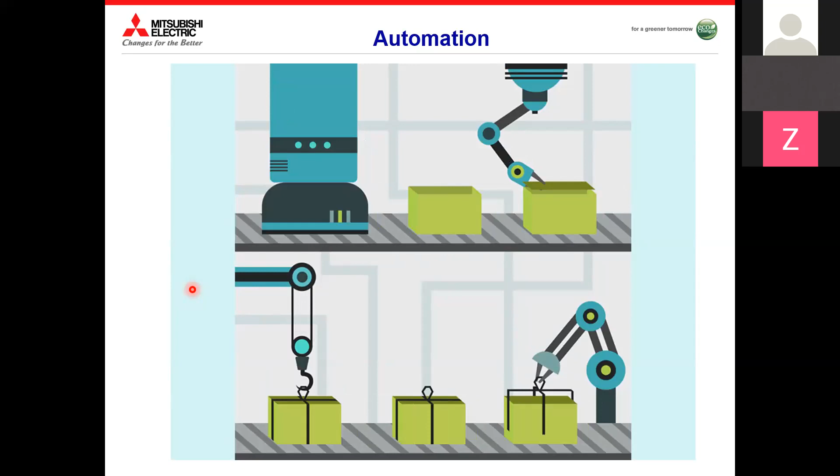This animation shows you how automation works for packing material. Even though it has not shown any manpower involved, you can still minimize the manpower. Instead of 4 members, you can work with 1 member. The dependency on human beings gets minimized by using automation.

So the background of these solutions involves products like PLC, robotics, and many different kinds of automation products.

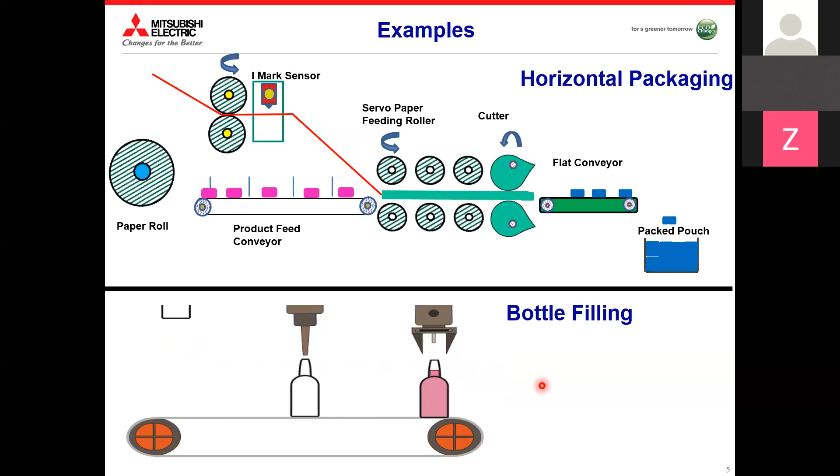This is another example of packaging. Here at the back end you can see what we have used, like PLCs, controllers, HMI, and servo. In the front screen you can see how the roll is getting unwound, how the tension is maintained, and converting it to a particular bag. But at the back end, such kind of automation system is being used.

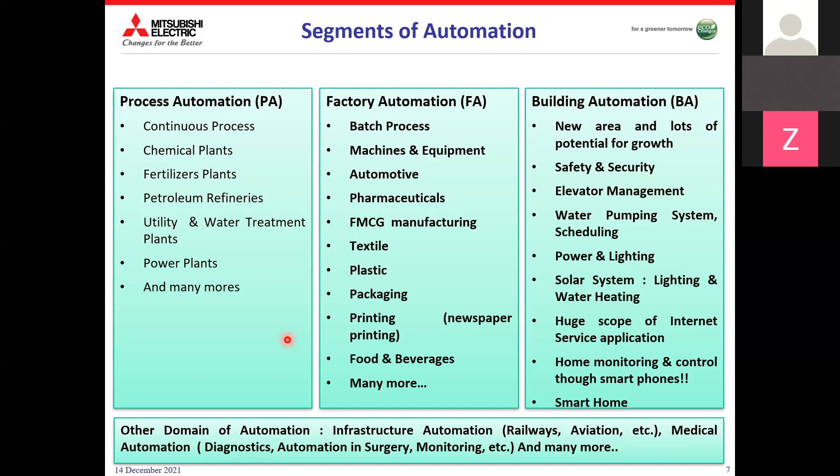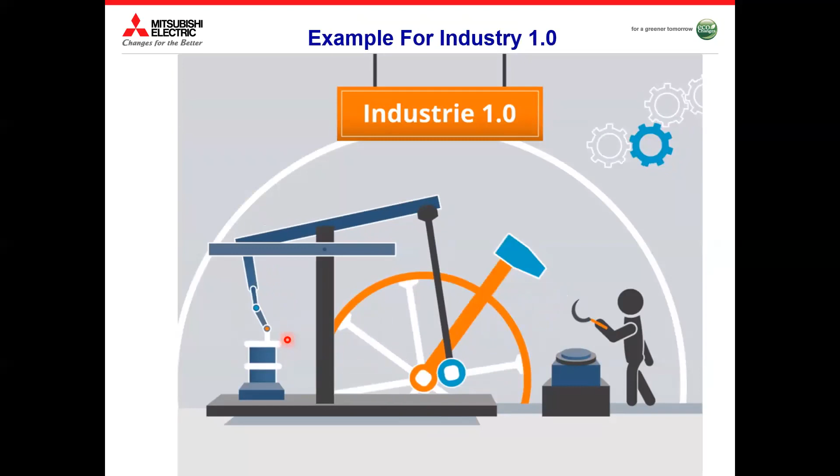This is one example of Industry 1.0, showing how mechanical energy has been used for production. You can see this hammer is being managed to work as a human hand, so that it can help in industry for any kind of production. This is the example of the 18th century where we were talking about Industry 1.0.

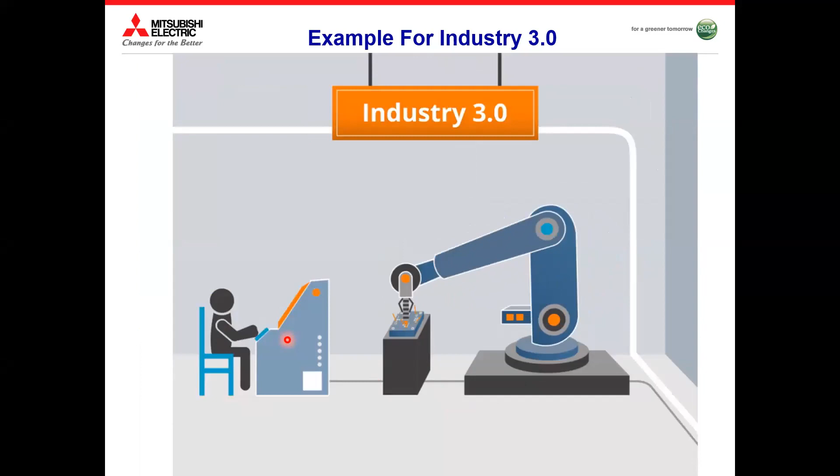I'll put up some case studies for factory automation, why it is required.

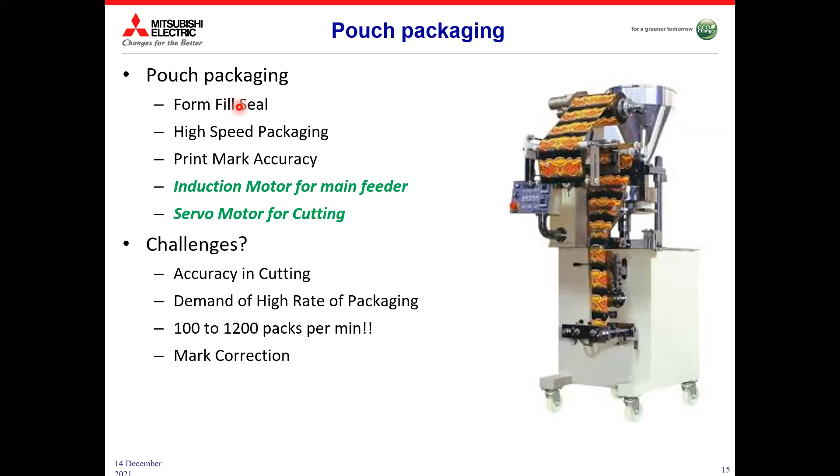In the previous example, you saw how that tea bag was packed nicely, how proper the cutting of the box was. So this is a very critical and challenging part, which of course we can overcome by using automation. The demand rate is very high, like earlier 100 to 1200 packs per minute, and customers nowadays are demanding even more than that. PLCs, drives, servo motors, and induction motors are the components for this kind of machine as part of automation. So the engineer has to deal with all these components to make such kind of solutions.

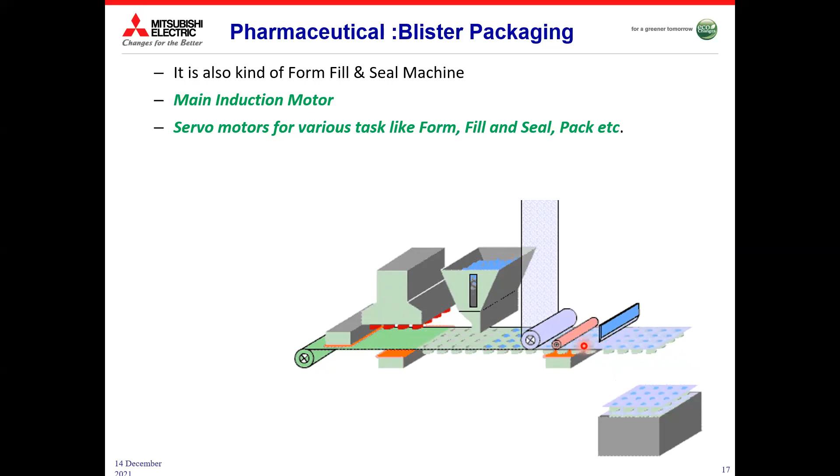See, you can see here the challenges you can face while implementing such kind of automation, or what are the demands from the industry side.

Demand rate has increased manifold. For example, when we talk about packaging, earlier 100 packets per minute was good enough. But nowadays people's expectation is more than 1,000 packets per minute. Just imagine, within 1 second you need to produce 15 to 20 packets. So you need to tackle such kind of challenges by using automation products.

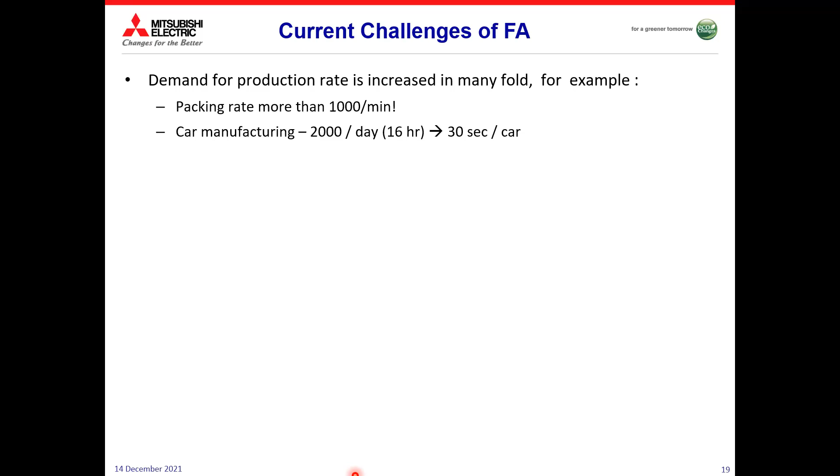Easy product change. All the customers want a single machine where they can use the same machine for small pack, medium pack, and large pack. They don't want to keep 3 machines. So there's a need for flexibility in machines for easy product change.

Synchronization of moving parts. When we are talking about such high accuracy or high production rate, the mechanical part should be robust to support that kind of system. Rest of the challenges like high accuracy, energy efficiency, these are some of the challenges that can be countered by using automation.

Of course, the engineers are the backbone for such kind of automation.

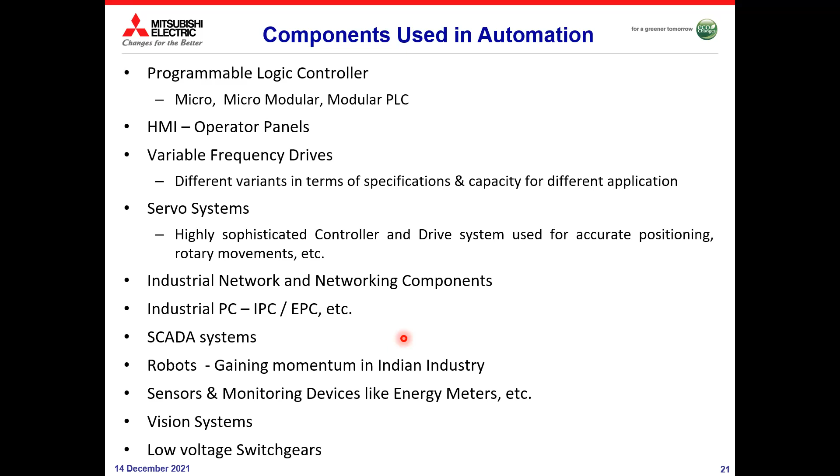These are some examples of automation where components are being used, starting from PLC, HMI, variable frequency drive, servo system, networks, IPC, SCADA, robotics, and all the things. Let me put you quickly in front of Mitsubishi's things, then I'll take you to robotics directly.

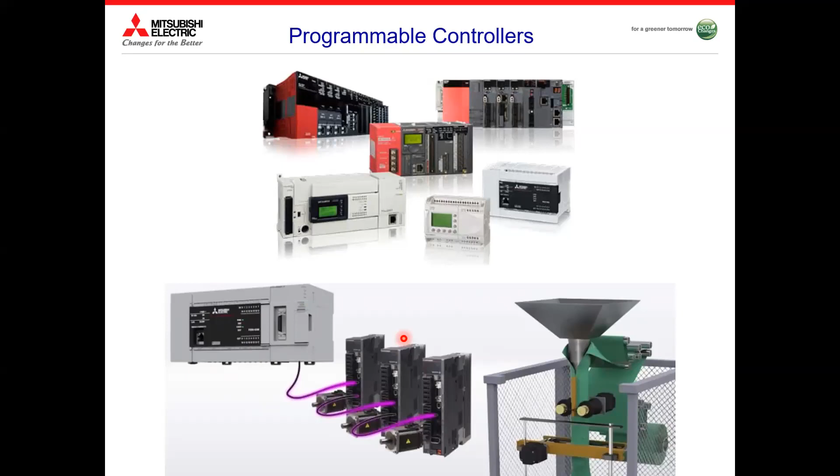This is cheap and has less IO handling capacity. It has a lower version of the iQ-R PLC with memory capacity and processing. There are some more parameters.

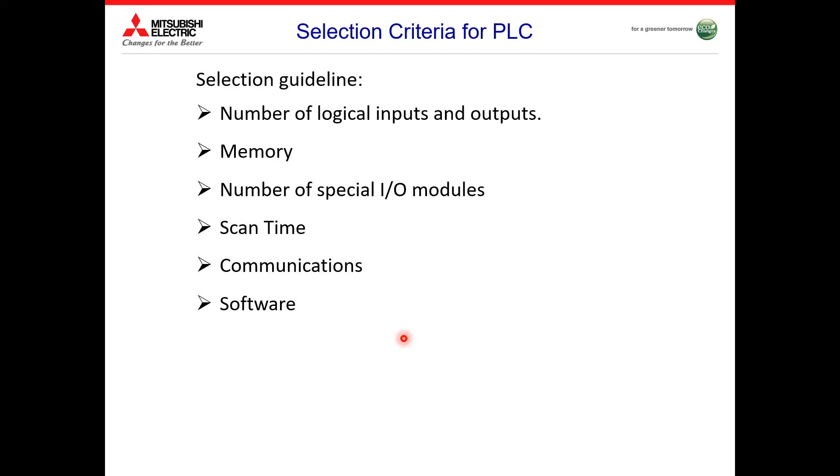When we talk about PLC, how to select it, some criteria like we should check the inputs and outputs required, the memory size, and the special IO modules we are going to connect. Special IO modules could be analog type modules, RTD modules, temperature controller modules, weighing modules, vision system modules. So how and what we want to connect. Scan time, communication software, of course, these are some of the areas to consider.

Everybody, as engineers, you know how the PLC works. First it sends the input signal, then based on our programming design, that input is processed, and accordingly the output module delivers the output. We can get voltage from the output module, and we can operate solenoid valves, contactors, motors in the field.

Another example is HMI, human machine interface. These HMIs are always used in front of the panel, so that the user doesn't need to open the panel or work on the PLC directly. They can control the PLC using this HMI. This HMI is used to display data, the production data, and to control the PLC, where you can input the field data as well.

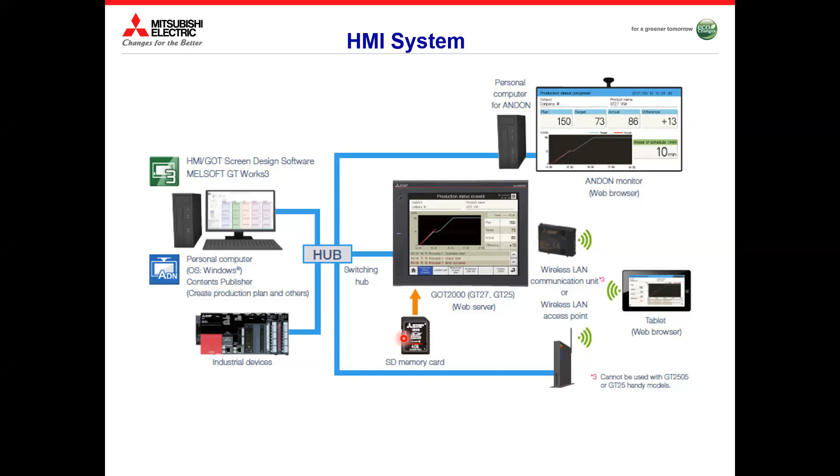We can use soft HMI. We have one good facility in our product: when HMI is not able to communicate with the PLC due to any reason, maybe it becomes NG or gets broken, so we cannot stop the production. We can temporarily convert our PC as a soft HMI, so we can operate the system from our laptop itself.

We have another good facility for Wi-Fi connectivity. We can connect this GOT through our mobile, smartphones, tablets. So from the remote location, we can monitor the GOT data. No need to move to the working area again and again. From your sitting area, you can monitor the production rate.

This is an example of the andon system. It is very often used in the industry. These are the big displays. Such displays are hung in the center part of the manufacturing unit area, where they can be seen by the maximum number of people on the shop floor. So you get different kinds of data, the production data, kind of failure. Some station is having a problem, some engineer needed.

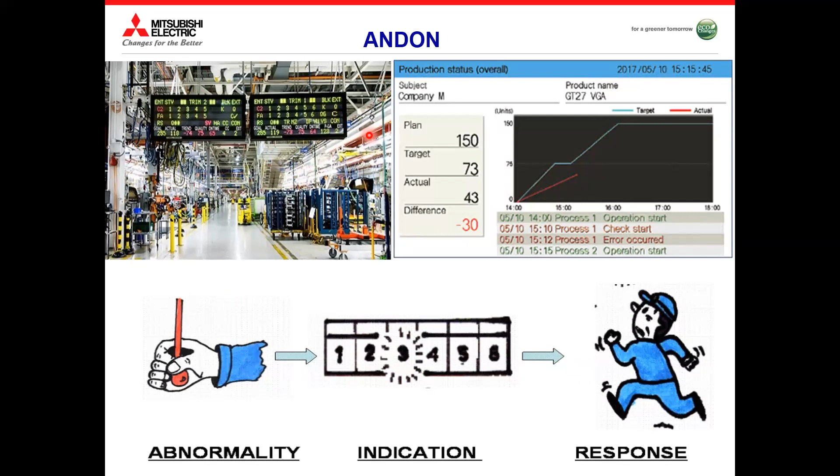So they use a pull cord system. They can pull this cord and station number 3 becomes NG. This message displays here, and when any maintenance engineer anywhere in the plant hears the hooter and gives attention to this display, he can judge that station number 3 is down. So immediately he can rush to that station to support. Such andon systems are very useful from a production point of view, to save time and have a wide vision of the production area.

Now another example of VFDs. VFD is being used for speed control of any kind of induction motor - that's the basic purpose. Of course, we can use it for torque control also, but majorly it's for speed control, and these VFDs are energy efficient as well.

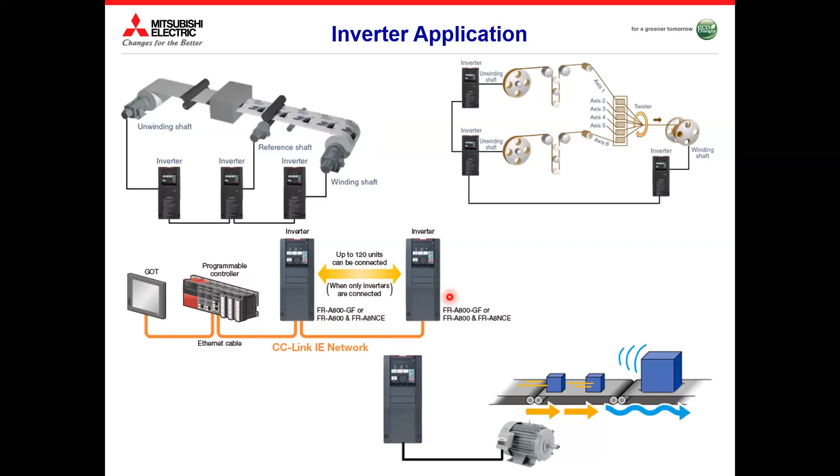The use of VFDs you can see in any printing application, any wire drawing machine application, any conveyor application. You can use the VFD as a standalone, and you can use the VFD with a controller also on the network. So it's up to us how we want to utilize it.

VFD - Mitsubishi MR-J5 is the latest servo system, which has a very high resolution. The resolution here we can get is 2 raised to the power 26 bits. If you calculate the number of bits, multiply this 26 times, then you will get a figure in more than lakhs, in millions. So it means in one rotation of the motor, that much number of pulses you can achieve.

Or indirectly, on a reverse way, I would say we can count even one pulse as well. Then you can divide that number of pulses by 360 degrees, so we can monitor down to 0.0001 degree as well - that's the resolution we can capture using servos. The servo system is majorly used for any kind of packaging system where we are going to control positioning. With VFD we're talking about speed control; here we are talking about positioning control. Of course, speed and torque control options are also available, but it's majorly used for positioning.

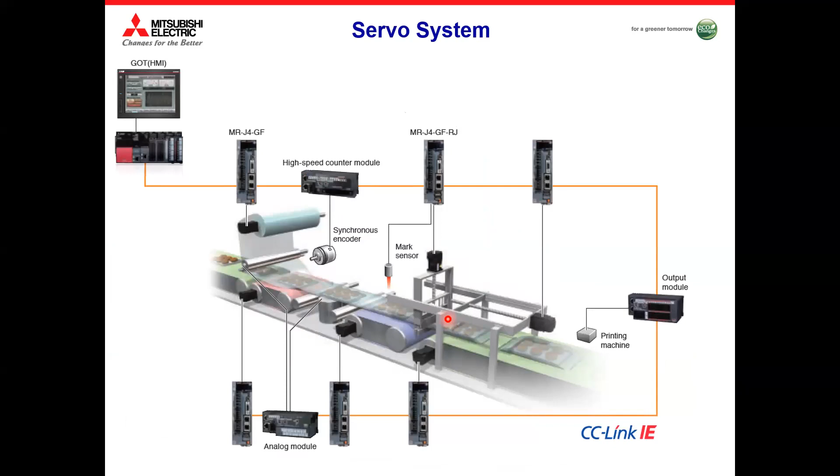You can look at some examples of how this servo is being used in applications. And these are some examples of printing.

Now coming to robotics, I will touch upon this part in my next slides, in the next PPT. In Mitsubishi, we have different categories of robots: vertical robots and horizontal robots, with payload capacity of more than 20 kg. More on the robotic side I'm going to talk about in a separate PPT, but just to show you how these robots are working in isolated mode or in a collaborative manner with the same job profile - they are working together as a human being.

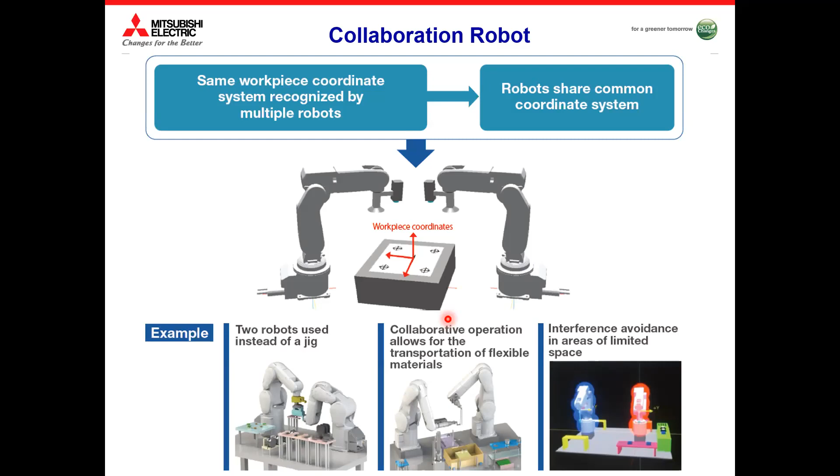So all together are connected through some network process. It may be any kind of network like Profibus, CC-Link, Serial, Ethernet. It could be anything depending on the size of the data we want to handle.

Then they come to one common area we call Edgecross technology, and this Edgecross technology passes this data from shop floor to another layer. So we are using OPC UA or some SCADA software, and from there we can put this data to cloud or internet or IT system or some database to control it.

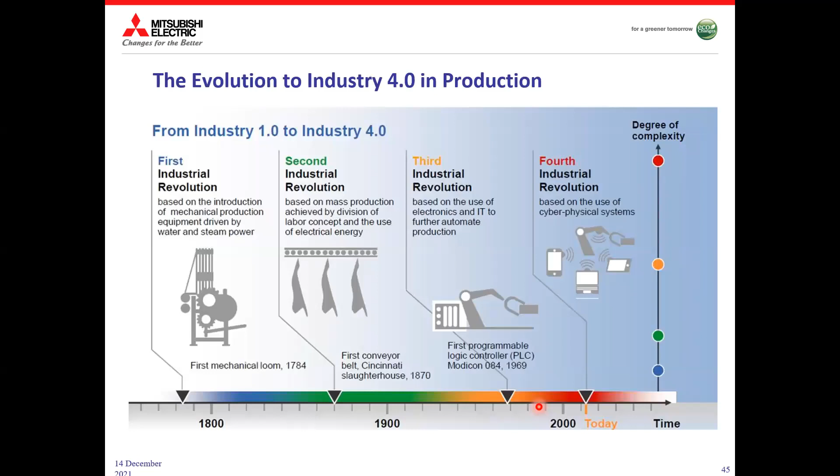This is the same thing I discussed earlier, how industry evolved from Industry 1.0 to 4.0. As I said earlier, Mitsubishi Electric calls it e-Factory, Germany calls it Industry 4.0, US calls it IIC, and Rockwell and other companies call it SMLC. So there are different names given by different industries, but the object and the outcome are the same: to connect the big data to the cloud.

This is the manufacturing trend. Industry 4.0 of Germany was introduced in 2011, IIC was introduced in 2012, Make in India was introduced in 2014, but Mitsubishi Electric introduced e-Factory in 2003. So you can see Mitsubishi Electric e-Factory is quite old, and we have more than 18 years in this concept.

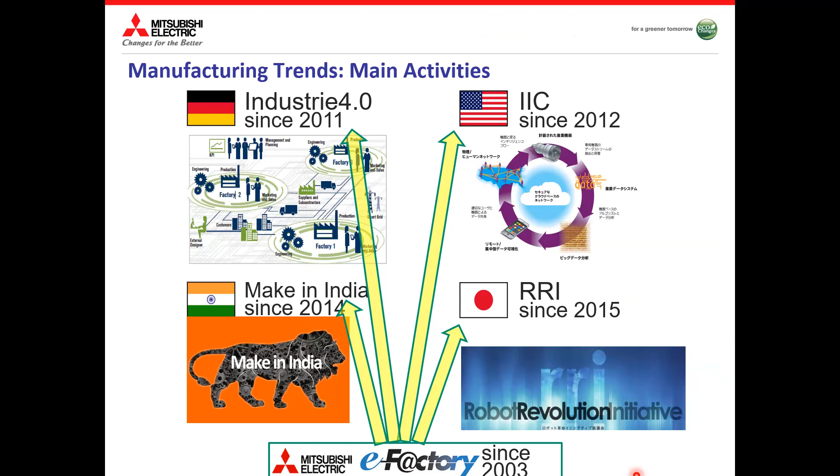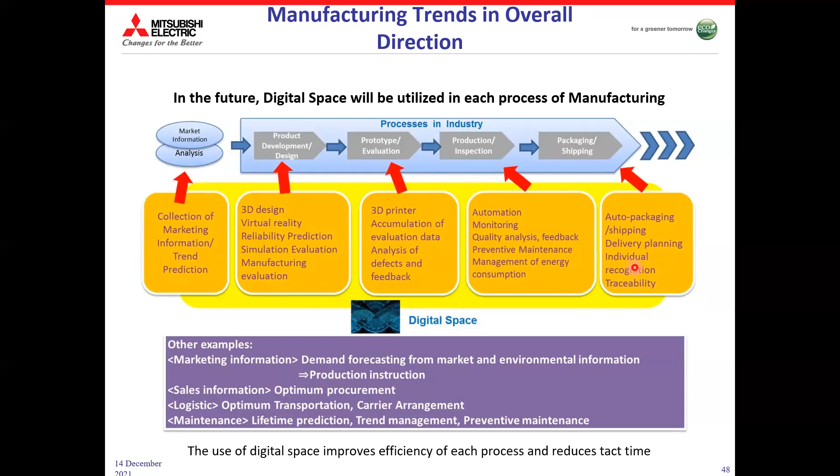Collection of the market data information, trend predictions, then they make a 3D design. Then they use 3D printers for prototype, and then they use automation for monitoring the quality aspects. Then for packaging also, they use automation for auto packaging instead of manual process. So this is how the manual process has been converted to digital space.

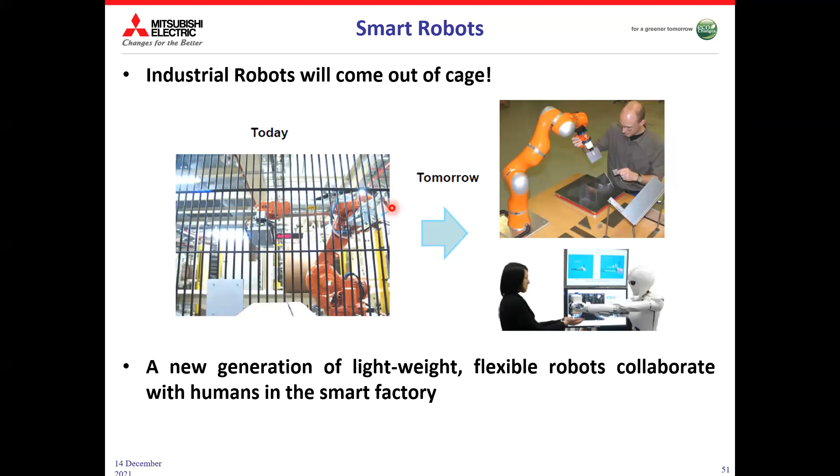Some manufacturing trends have changed by introducing some apps also. This is the cobot and robots, how robots are being used with safety guards or in cages. Now today we are talking about collaborative robots that are working with humans hand to hand. In my next PPTs I'll show you. So that's all about the automation concept.

Let me put you some information about robotics also, one minute.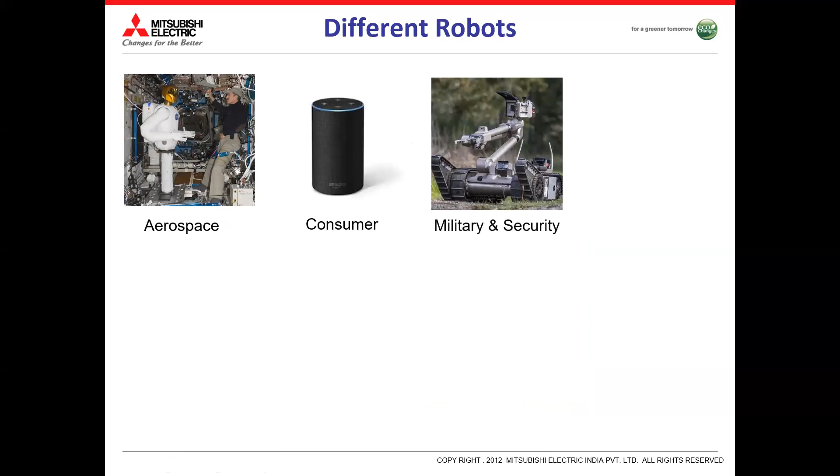For aerospace point of view, consumers, military and security operations, drones, some research, exoskeleton, humanoids, and industrial. Now we'll give focus on industrial robots.

So these are the different categories of robots, but now we are talking about industrial robots. The industrial robots can be divided into 4 different categories: one is articulated, second is Cartesian, third is cylindrical, fourth is delta. Under articulated robots, we have 2 categories, vertical and SCARA horizontal robots.

Under articulated robots, we have 2 categories for vertical and SCARA horizontal robots. In Mitsubishi Electric, we are dealing with articulated robots for vertical and horizontal type.

Second category is Cartesian, these have 3 linear joints that use the Cartesian XYZ joints and can work in the XYZ plane. Cylindrical works in a cylindrical shaped work envelope. Delta is spider-like robots built from parallelogram joints connected to a common base.

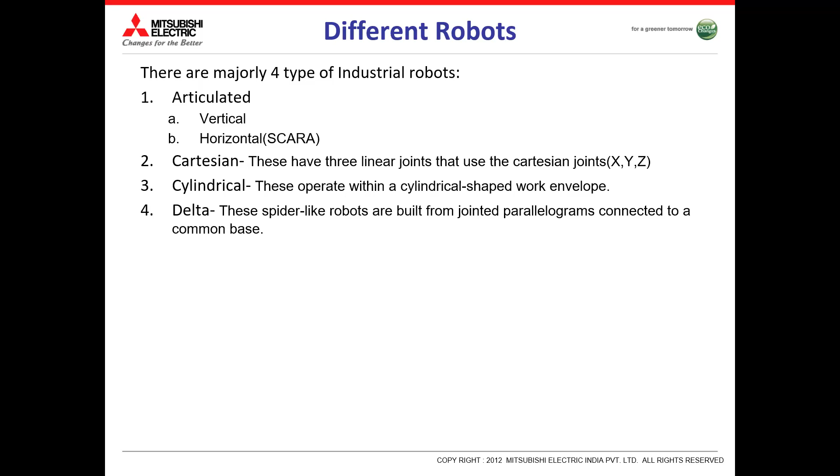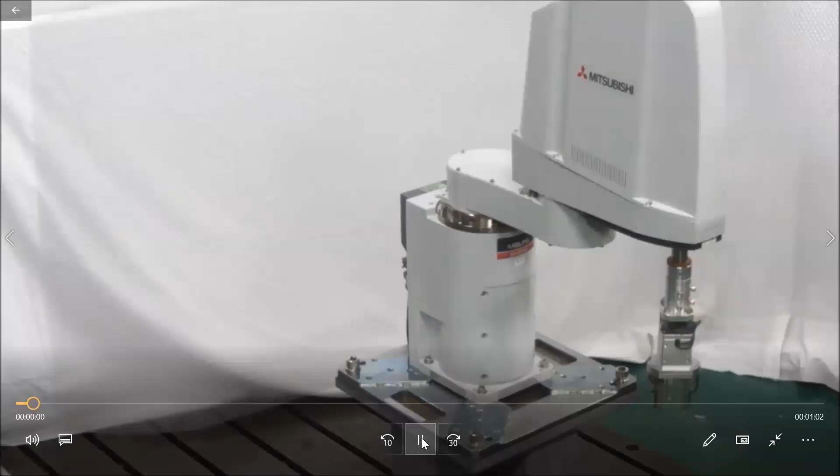Madam, is it visible? Is it visible now? Yes, sir. Yes, sir. Yes.

Now look, the speed has been reduced to 1/4, meaning 25% of the speed is being used. Just to make you aware how the movement of this horizontal robot is taking place, the degree of movement you can see left and right.

When coming back to this PPT, is it visible? Visible, sir, different robots here. Okay, can I take it forward? Hello, yes ma'am, can I take it forward? Yes, sir, please go ahead, sir. Thank you.

So what I was talking about before, the advantages of robot. A few examples are mentioned here, like hazardous environment, repetitive work cycle, consistency and accuracy, difficult handling tasks for humans, multi-shift operations, reprogrammable, flexible, and interface to other computer systems.

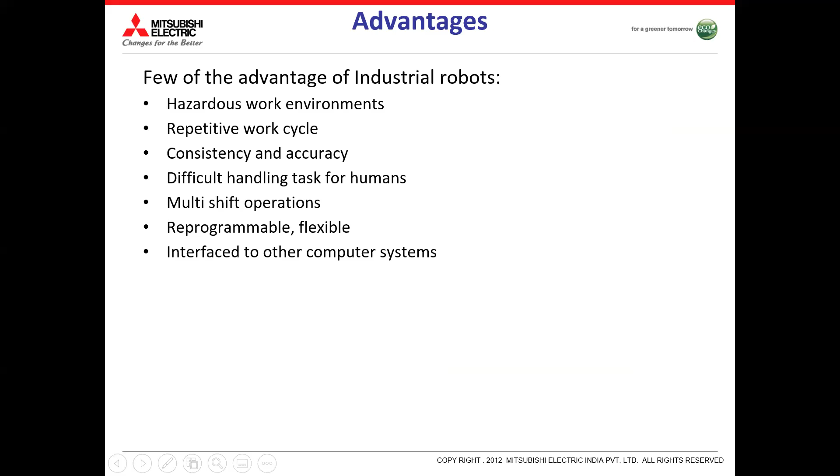So where can we introduce this robot system? See, these are some applications, where in automotive these robots are being used.

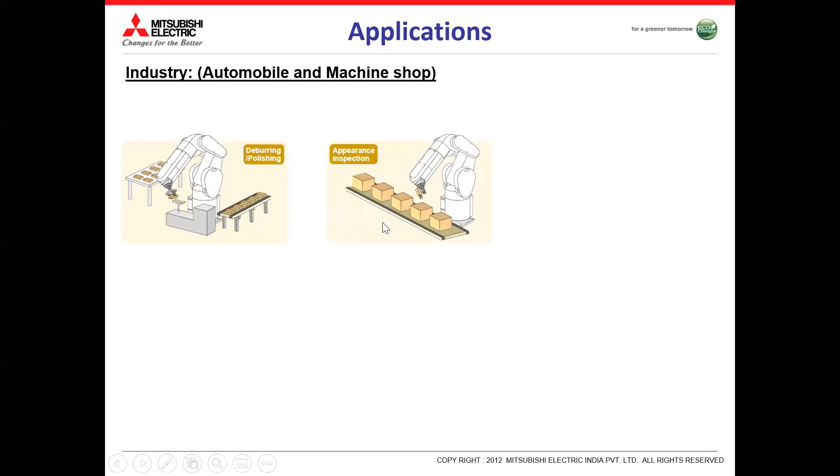This is a deburring and polishing application, how this robot is being used. Here you can look at the appearance inspection of the object, and the alignment of the molded goods, how we are going to place it and make the alignment.

I would like to present some videos based on these applications, the working applications, where Mitsubishi robot is being used for such kind of application.

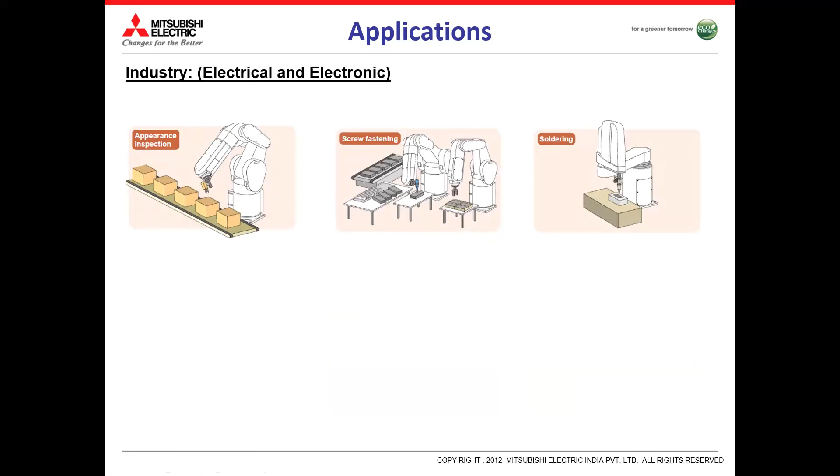Another example we can take up from the electrical and electronic section: appearance inspection again, and screw fastening. You can take the example of soldering of any component, laser marking, sealing again, and mounting of parts on any PCB.

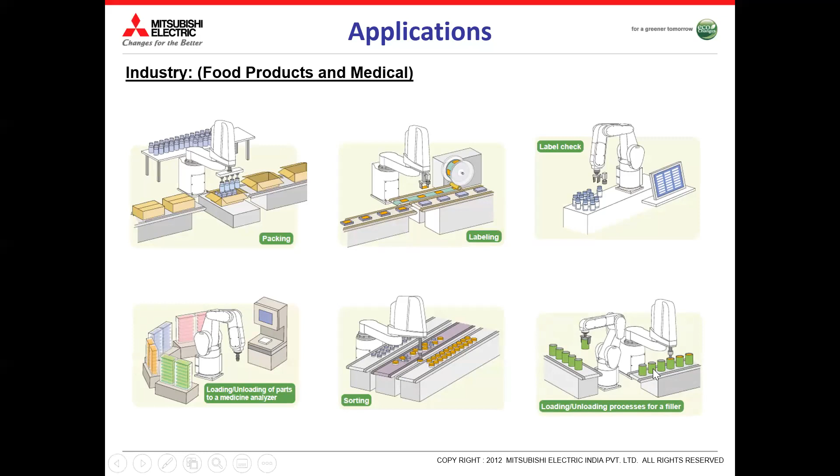So here, as I said before, I would like to play some videos on these applications to make you understand how robot works. Let me finish this PPT first, then at one go I'll play these 3 or 4 videos for your reference. This is the example of oil seal assembly.

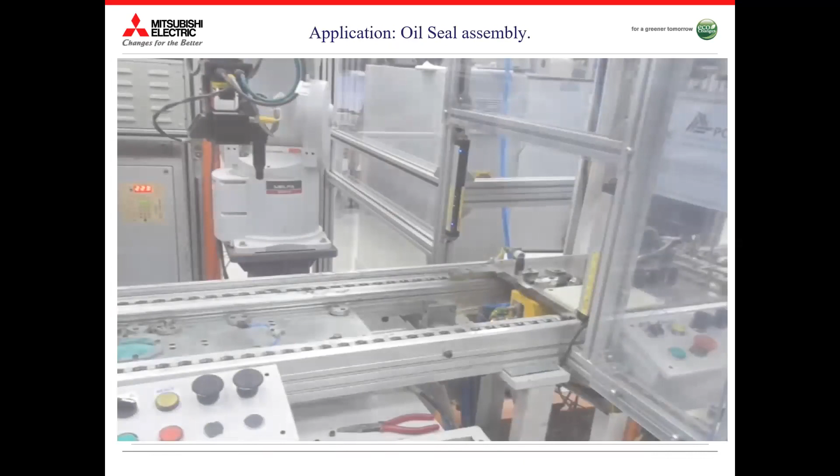This is the typical structure of automation where the robot is being connected to the rest of the components. You can see here the robot with the standalone controller is connected, and this is the vision system connected to the PLC system, and from this PLC it is connected to HMIs or to the eFactory concept.

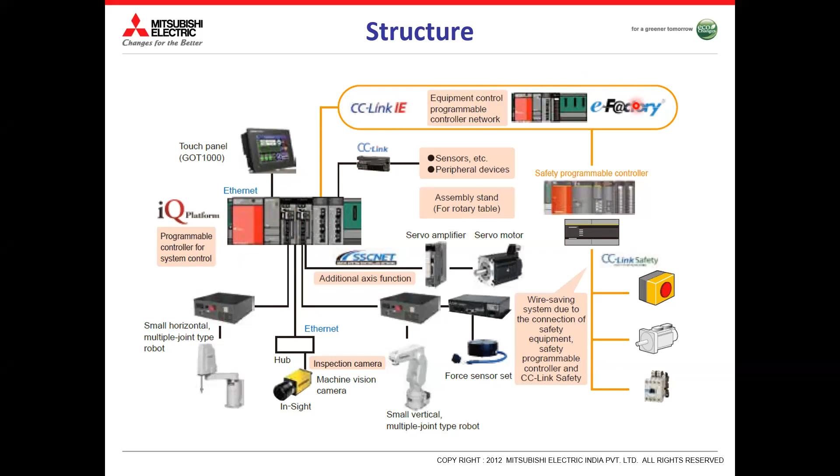Again, for safety purposes, the robot has some safety walls and some sensors. We can define the working area where the robot or human being can work, and thereafter the robot can handle the job. This is the safety area.

When we are talking about Mitsubishi robot, as I said, we had 2 categories for FR series robot. It is the latest series of vertical category in Mitsubishi Electric, and we can handle the robot always calculated or discussed with a couple of parameters. One is load.

Payload is for 20 kg, so up to 20 kg load we can pick using Mitsubishi robot. Second is the arm length, the reach of the robot. So the maximum reach of Mitsubishi robot is 1503 mm. These are the 2 important parameters while selecting any robot. So we have a range from 3 kg to 20 kg, and the maximum reach from 504 mm to 1503 mm.

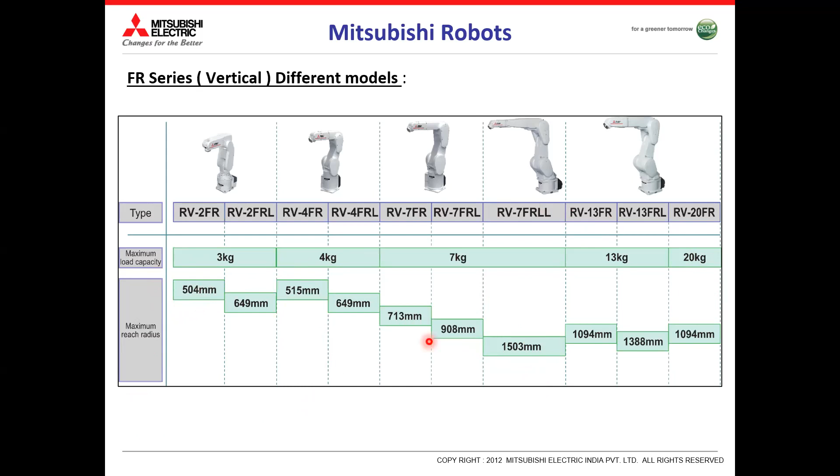This is robot anatomy. Basically, the vertical robot, articulated robot, is a 6-axis robot. You can look at this base, joint 1. Joint 1 means axis 1. This is joint 2, axis 2. This is joint 3, axis 3. Joint 4, joint 5, and joint 6.

This slide shows the movement of individual axes, the direction of the movement. Axis 1 can work, can move circular. Axis 2, the direction of the movement you can look at. Axis 3, the direction of movement you can look at by these arrows. Axis 4 is moving like that. Axis 5 and axis 6.

This is basically the vertical robot workspace where this robot can work. In that last video, you might have observed this vertical robot can stretch at full and can move from extreme front to the rear left. This is the workspace we call where the robot can move.

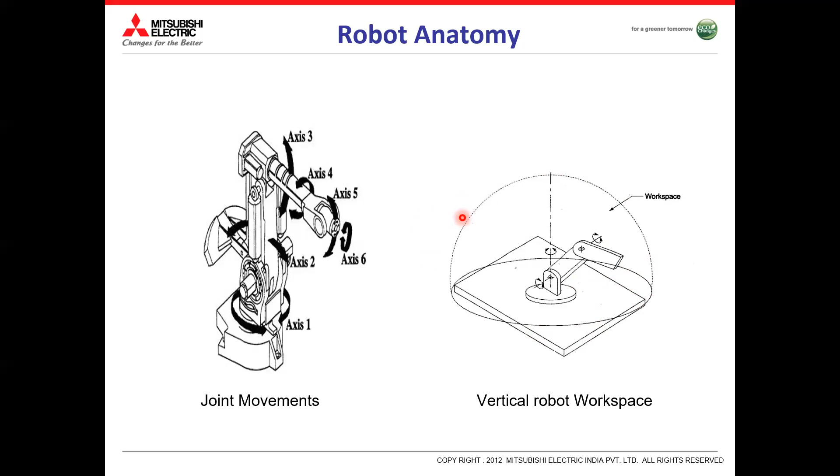Again, anatomy of 4-axis horizontal articulated robot. In horizontal robot we have 4 axes, basically joint 1, joint 2, joint 3, and joint 4. These joints represent the axis basically. And this axis means, here some servo based motors are being used inside for the movement of this axis.

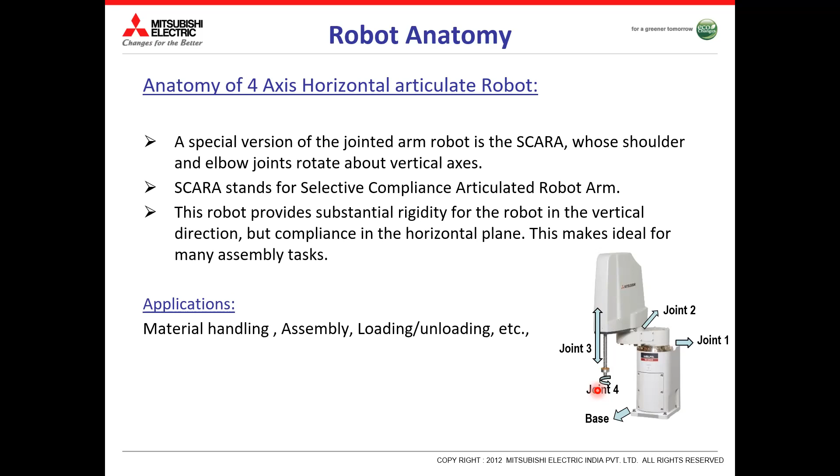Again, this arrow represents the direction of movement of this individual axis, and this shows about the horizontal robot workspace, the area you can define for safety point of view.

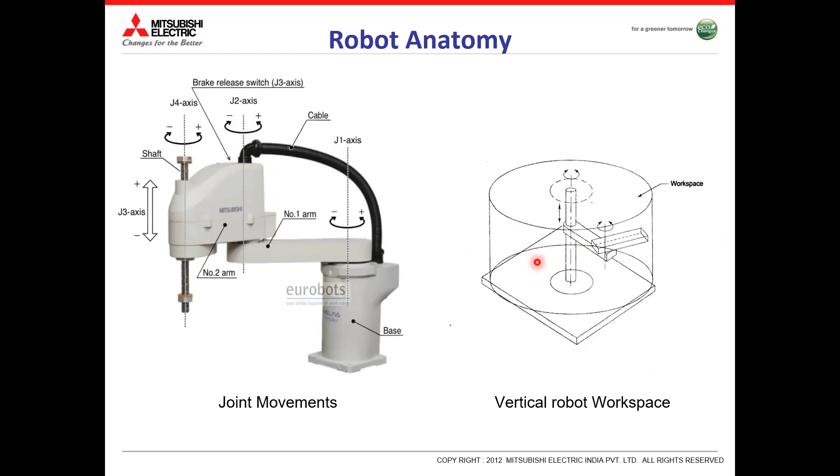Robot coordinates. When we are talking about robot, before to start any robot, we need to give a reference area. Reference area means from where the robot should imagine this is the reference plane for him, and from here it has to move. When you are saying you have to walk for 1 kilometer, you need to make a reference point for yourself, like this is the 0, and from here you are going to start until 1 kilometer you will move. Same way for robot, in our technical language, we call it the origin.

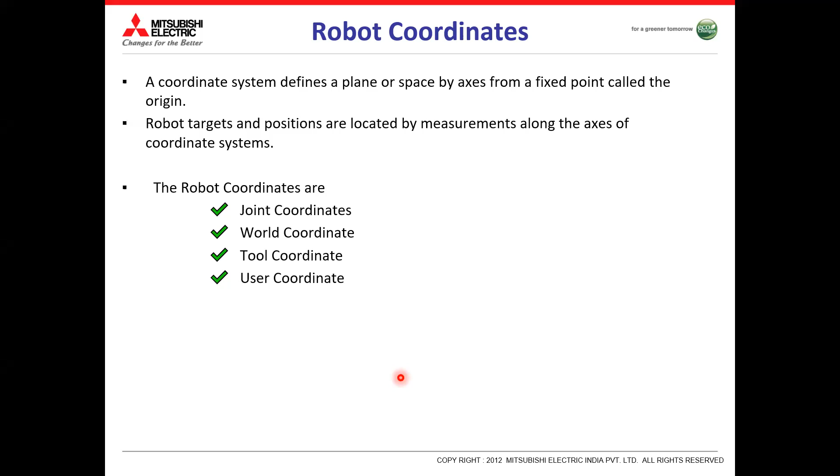So these are some terminology about the robot. While talking about the reach, it's the maximum horizontal distance from the center of the robot waist to the end of its wrist. This is an important parameter when we are talking about a robot, how much is the reach of this robot. Second is maximum speed. I forgot to tell you about the maximum speed of the robot in the vertical case, that is more than over 10,000 mm per second.

Okay, but again, when it is at full synchronization of all the axes, that is a theoretical value basically.

Let's read out here what is the maximum speed. A robot moving at full extension with all the joints moving simultaneously in complementary directions at full speed. The maximum speed is the theoretical value which does not consider under loading condition.

Another is payload, the maximum load we can connect. The maximum payload is the amount of weight carried by the robot manipulator at reduced speed while maintaining the rated precision. These ratings are highly dependent on the size and shape of the payload due to variation in the inertia. In short, how much load the robot can carry.

Then accuracy and repeatability, these are some of the terminology being used while talking about the robot.

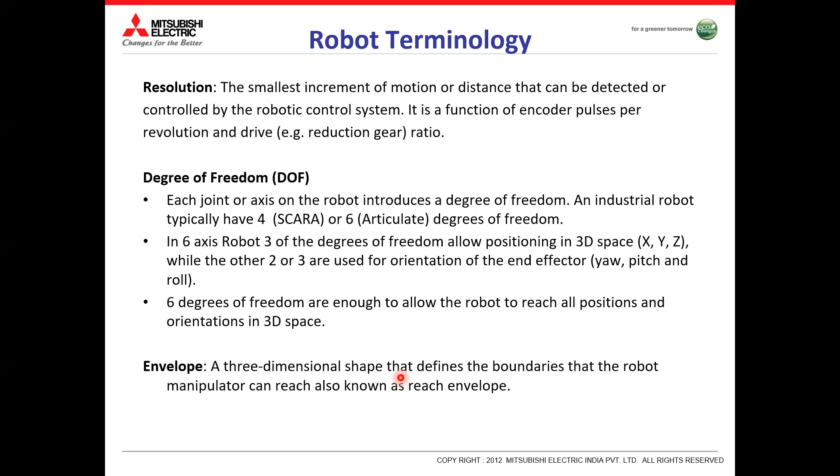So envelope is a 3-dimensional shape that defines the boundaries that the robot manipulator can reach, also known as reach envelope. It means the complete area where the robot can move at full speed and full arm length, reaching from corner of one axis to the other side. In my previous slide I have shown you the work envelope the robot is being used in.

A very small information about vision cameras. We have a facility to connect the vision system to our robotics. We can connect 2D category or 3D vision systems.

These are the images you can look at here. In 2D we get a flat image of the object, and in 3D we get a 3D effect. These are the features of the camera vision system, and we have a facility to read out the coordinates from the camera.

We have a dedicated protocol for our supporting partners. Otherwise, we can connect third party vision systems on Ethernet IP or different protocols. These are some examples of the cameras being used, 2D dimensional or 3D dimensional.

So I'll show you some of the videos. I'll play around to showcase how this vision system has been working for inspection of any object.

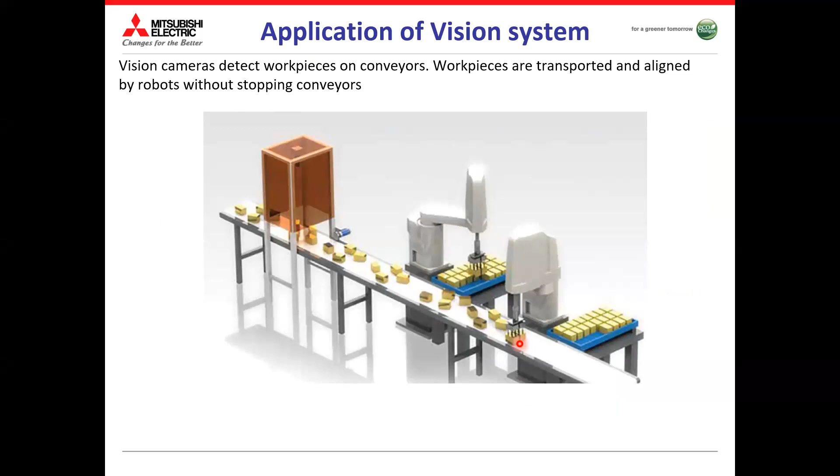This is about our robot design software. We call it RT Toolbox 3, where you can design your workspace, design the coordinates, and have a simulation mode of the robotic solutions.

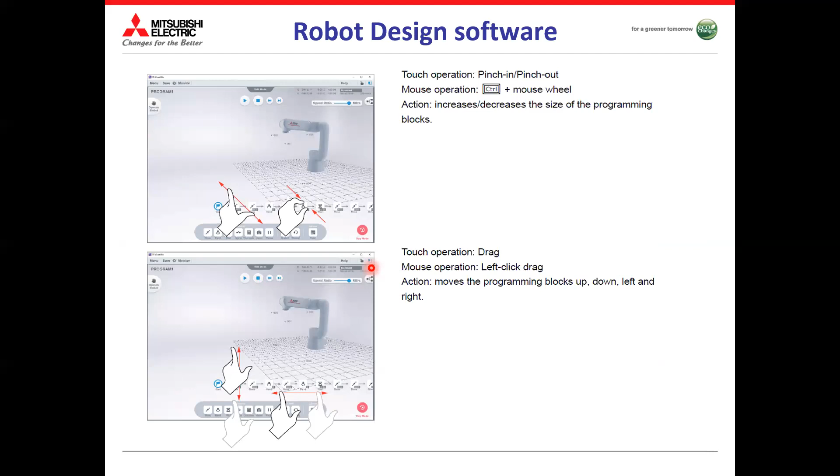So that's all about this robotic, I'll play some video for you. This is just to showcase how this workspace is working, how we can define the coordinates, and how we can enlarge this box size while working on the software side. So that's all about robotic.

This is a small information about the robot of Mitsubishi robots. Sometimes we can get the time to have a practical hands-on at Manav Rachna College. And now allow me to share some videos about this application, different categories, how the robot is being used in real environment. One minute please.

Is this slide visible? Mitsubishi Electric robot videos. Sir, actually the PPT is visible. Yeah, PPT, I have shown you PPT only. But in this PPT, which PPT can you look at? Mitsubishi Electric robot videos? Yes sir. Yes, yeah.

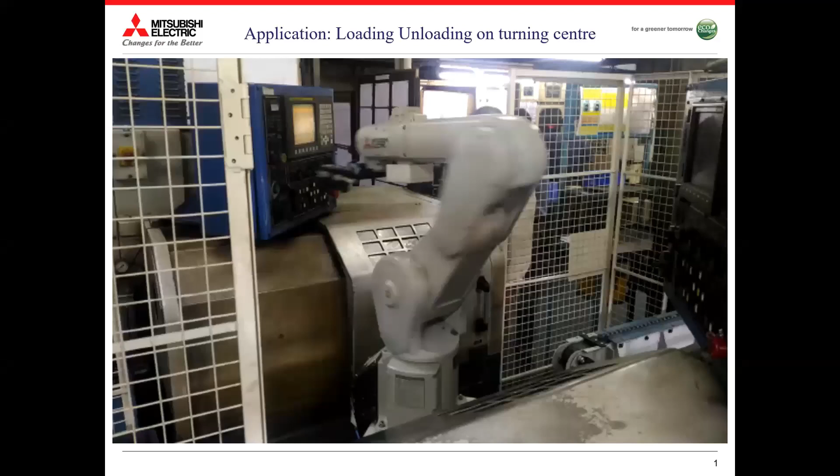See, this is the real application, the real application for loading and unloading area. Just look at how this robot is being used in the critical area where humans cannot work. That is why we introduced the robot, and why we introduced a vertical robot instead of horizontal. Just look at the application, the movement of the object, and the robot required - that's why we have selected a vertical robot.

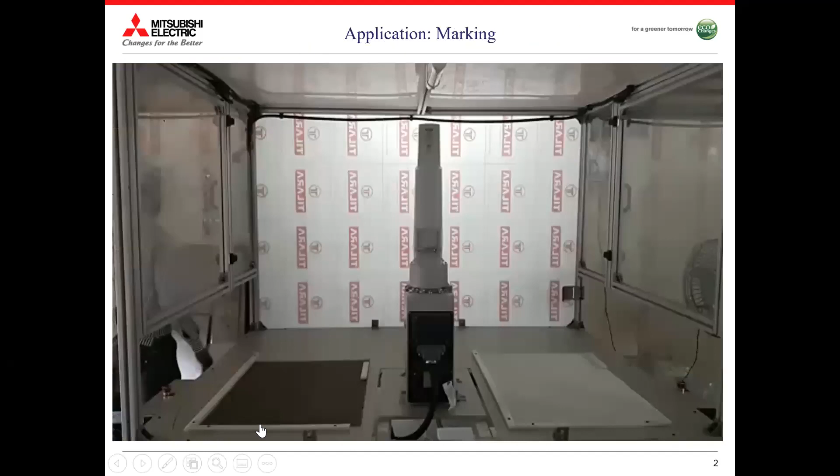And this is another example of marking application. Just look at.

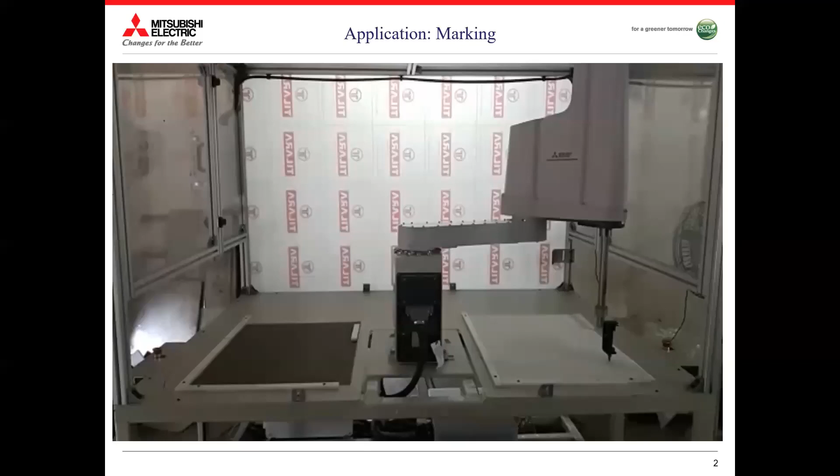Is these videos visible to all of you? Hello, am I audible? Yes sir, so can you see these videos? Yes sir, videos are visible sir. Thank you so much.

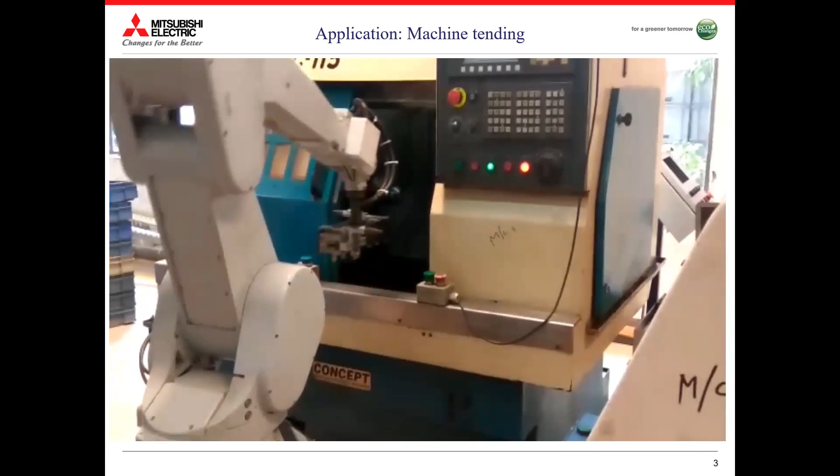This is machine tending. Okay, so in this machine tending application, you can see this robot is working with two different machines, taking the object from one machine and working with another machine. Just imagine, due to safety reasons, if a human being has to work in this environment, there are high chances of an accident to the human being. To keep the safety point of view, robots have been introduced in such applications.

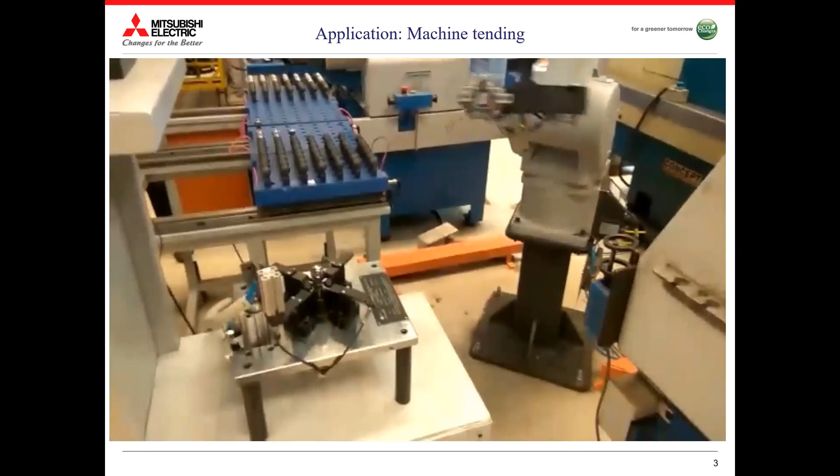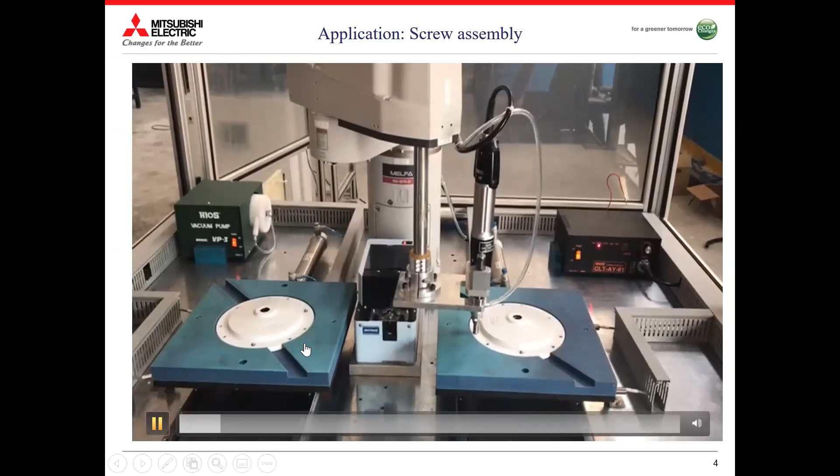So this is the example of screw assembly. In my slide I showed you this image, and this is the ceiling fan assembly, how it is taking place. Please look at. So it automatically picks up the screw and assembles it into the fan.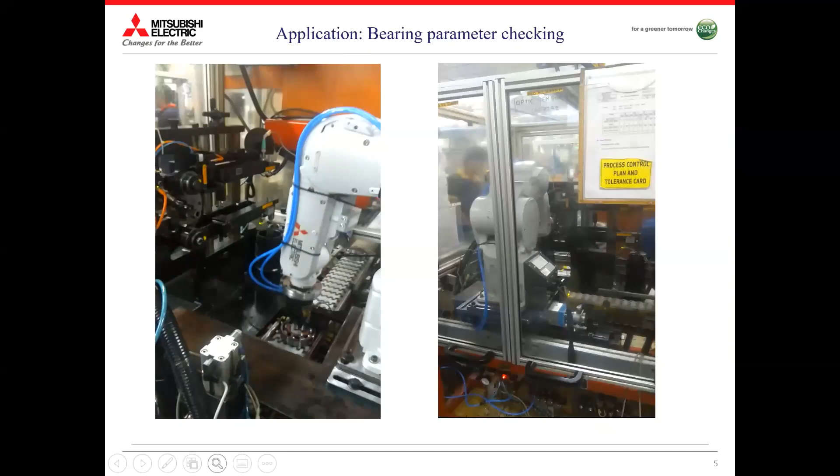This is bearing parameter checking, for inspection point of view, how the robot is being used.

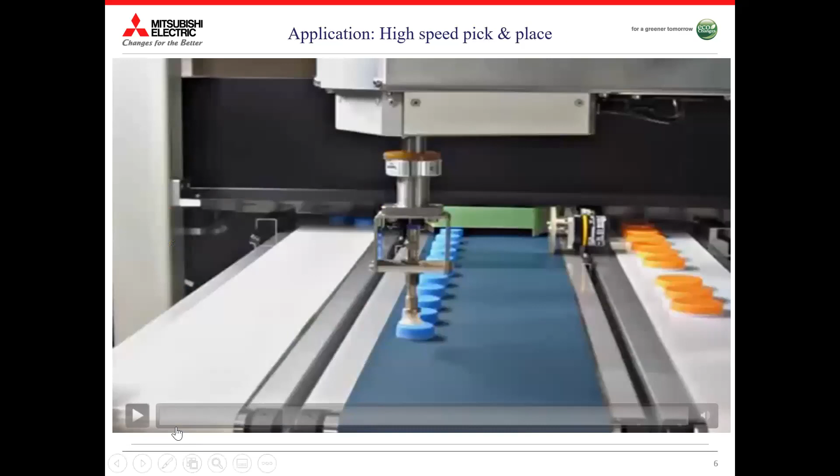I'll show you one more example of a high-speed pick and place application. You can see in this video that the middle conveyor has the objects, and these objects are not in symmetry actually. But still the robots are picking this component and putting it on different conveyors in a systematic, predefined manner. This is the beauty of using a robot. If we are dealing with human beings, such a fast response is difficult to get from a manual system. I would like to continue playing this.

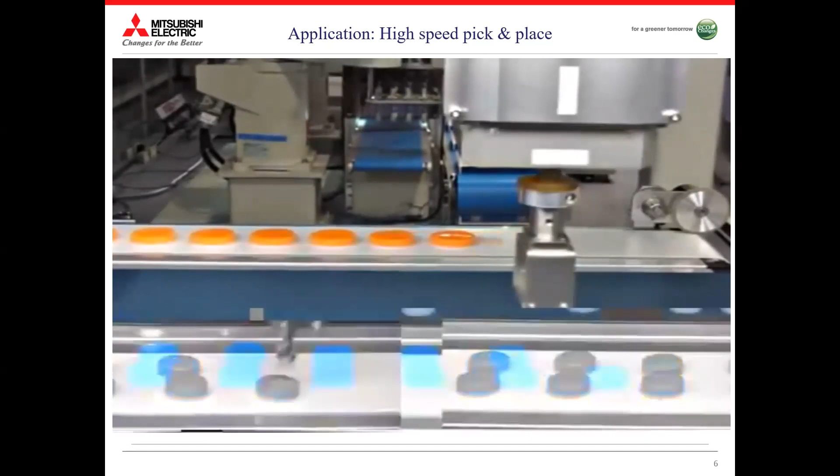You must have observed that the robot is not just working in a fixed manner as programmed. In fact, it is sensing, and accordingly it is taking its decision. When you observe this movement of picking objects from the conveyor, there's not even symmetry of the components. Sometimes the robot has to work fast, and sometimes a bit slow, to pick one component or two components. So that observation is required to monitor such videos, to see how the robot is working.

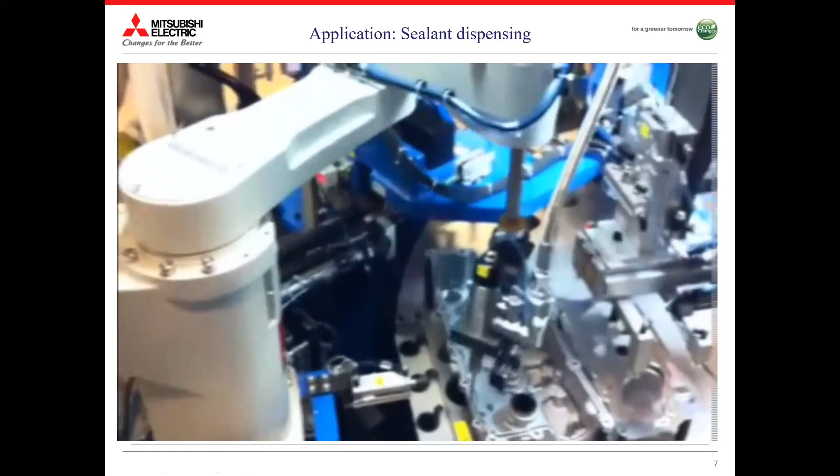I'll show you some more video on sealant dispensing. You can see the sealant being placed at the corner of this object. This is part of an engine assembly basically, so you require to put some sealant. This is the oil sealing assembly.